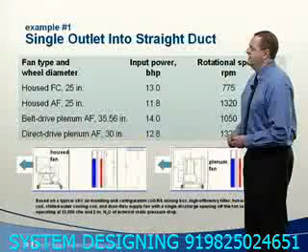Using our same example VAV air handling unit with this discharge configuration, the housed airfoil fan requires 11.8 brake horsepower compared to 14 for the belt drive plenum fan and 12.8 for the direct drive plenum fan.

While the housed fan requires less power, the plenum fans will typically have significantly lower discharge sound levels. The reduced sound levels occur partly because air velocity dissipates more quickly as the air pressurizes the plenum surrounding the fan, and because the plenum provides an opportunity for some of the sound to be absorbed before air discharges from the unit.

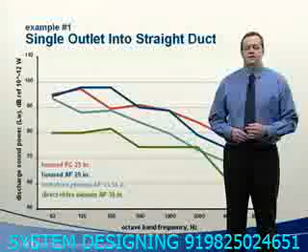The direct drive plenum fan reduces sound levels even further because it does not have the belt-related drive losses and associated noise, and because there are no obstructions in the inlet and the motor is mounted behind the fan wheel, it does not restrict airflow leaving the fan.

Of course, this chart compares discharge sound. On the inlet side, plenum fans will usually have higher sound levels than housed fans. So depending on the fan's location within the air handling system, either discharge or inlet sound may be more important. So the best fan choice depends on the application.

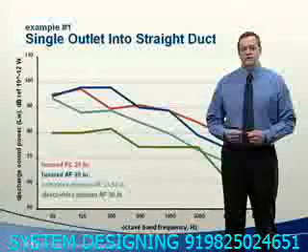If the air handling unit has a draw-through fan that discharges directly into a sufficiently long, straight section of duct that's about the same size as the fan outlet, a housed airfoil fan will typically require less power than a plenum fan, but a plenum fan will likely have lower discharge sound levels.

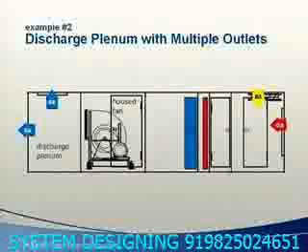Let's look at another example. A discharge plenum is often added downstream of a housed fan to reduce discharge sound levels or to provide more flexibility, like multiple duct connections or to allow for an abrupt change in direction.

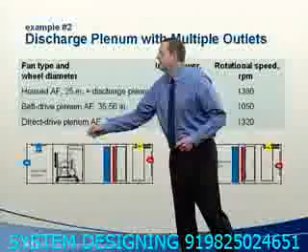But as I mentioned, a housed fan is at its best when discharging into a straight section of duct. When a housed fan discharges into a plenum, the energy losses result in increased fan power. In our example, adding the discharge plenum to the housed fan increases its brake horsepower from 11.8 to 13.2 since it no longer discharges into a straight duct.

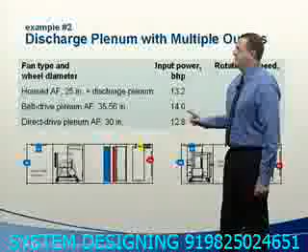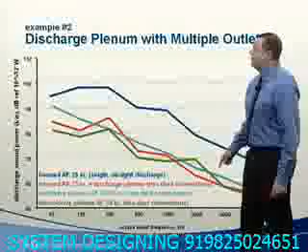This is still lower than the belt drive plenum fan, but now the input power for the housed airfoil fan is higher than the direct drive plenum fan. But adding the discharge plenum does allow the housed airfoil fan to achieve similar discharge sound levels that are fairly close to the plenum fans.

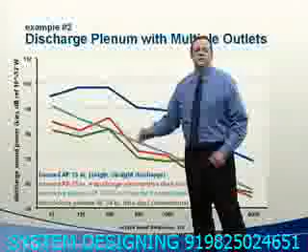In this example, the direct drive plenum fan is still the quietest, especially in these low frequency octave bands that are difficult to attenuate. So, when a discharge plenum is added to a draw-through housed fan, it results in more fan power being consumed, typically to the point where a direct drive plenum fan has about the same power consumption as the housed airfoil fan.

And discharge sound levels are similar, if not better, with the plenum fan. But the air handling unit with the plenum fan will likely be shorter. In this example, adding the discharge plenum to the housed fan increased the overall length of the air handling unit by more than 3 feet.

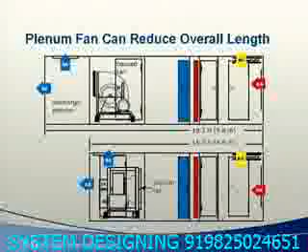When multiple supply duct connections are desired, a housed fan requires a discharge plenum to allow for the multiple connections. With a plenum fan, multiple duct connections can be made to the fan section itself, eliminating the need for a discharge plenum and resulting in a shorter unit. Due to installation restrictions, it's often unlikely that a housed fan can be installed in the ideal configuration as shown in example 1. This makes the use of discharge plenums and multiple supply duct connections fairly common.

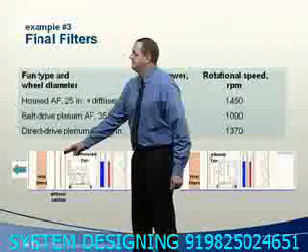Let's look at one more example. In some applications, final filters are included as the last section in the air handling unit. When a housed fan is used, a diffuser section must be added downstream to provide even airflow through these final filters. This is not a requirement for the plenum fan since it pressurizes the surrounding plenum and provides even airflow through the filters with minimal downstream distance.

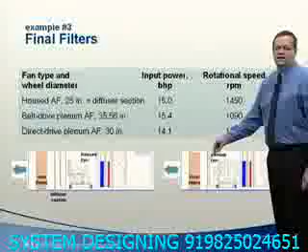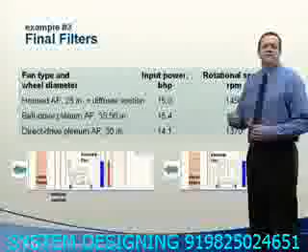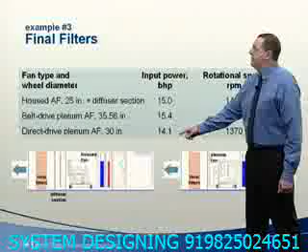In this configuration, the input power for the housed fan increases due to the pressure drop of the diffuser and the fact that the housed fan is no longer discharging directly into a straight section of duct. For our example, the direct drive plenum fan requires the least amount of power, 14.1 horsepower compared to 15 for the housed airfoil fan.

Let's summarize this discussion of housed versus plenum fans.

When discharging into a single, sufficiently long, straight section of duct that is about the same size as the fan outlet, a housed fan will likely require less power than a plenum fan, but a plenum fan will likely have lower discharge sound levels. If a discharge plenum is added downstream of a housed fan to reduce sound levels or to allow for discharge flexibility, a direct drive plenum fan will likely require less power than a housed airfoil fan, with similar or superior discharge sound levels. Additionally, the plenum fan will likely result in a shorter air handling unit.

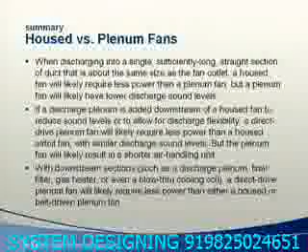When downstream sections are present, such as a discharge plenum, final filter, gas heater, or even a blow-through cooling coil, a direct drive plenum fan will likely require less power than either a housed or belt-driven plenum fan.

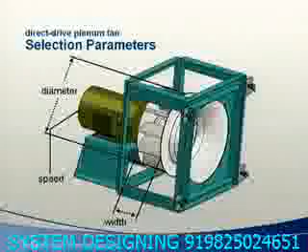Before we leave the discussion of plenum fans, let's discuss the use of direct drive rather than belt drive plenum fans, which have allowed for some changes to traditional paradigms when selecting the fan. Historically, the diameter and width of the fan wheel would often be predetermined by the fan manufacturer of the air handling unit. The variable open to change was the rotational speed of the fan shaft, or RPM, which was adjusted using belts and sheaves.

Today, direct drive plenum fans are available in various wheel diameters and wheel widths. Even though there are no belts and sheaves to adjust speed, the fan can be operated at various speeds by a VFD. In a sense, the VFD on a direct drive plenum fan replaces the drive kit that would be used for a belt-driven fan.

Most people think of a VFD as being used to reduce the speed of the fan, from the motor synchronous speed to some minimum turn-down limit of the VFD. However, the VFD can also be used to operate the motor above synchronous speed. This provides the opportunity to use one of two selection approaches.

The first, which we'll refer to as synchronous speed selection, operates the motor at its synchronous speed, typically 1800 or 1200 RPM. The diameter or width of the fan wheel is then changed to achieve the desired performance.

Flexible speed selection is a relatively new concept in the industry. With this approach, the width of the fan wheel is held constant, and the diameter or speed of the fan is then changed to achieve the desired performance.

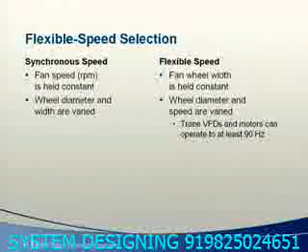As an example, the VFDs and motors that Trane uses for direct drive plenum fans and air handling units can operate up to at least 90 Hz, which equates to about 2700 RPM for a nominal 1800 RPM motor. Flexible speed selections typically allow for a more efficient and quieter fan choice.

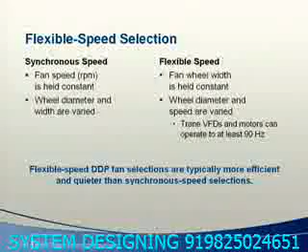Let's look at an example. Using the same example VAV air handling unit, here are two selections for a 30-inch diameter direct drive plenum fan. The first row shows a synchronous speed selection, and the second row shows a flexible speed selection.

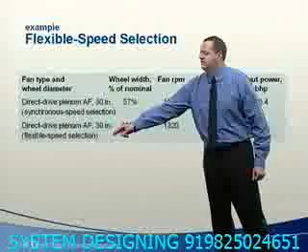For the first selection, the motor's nominal speed is 1800 RPM. To deliver the desired airflow and static pressure, the width of the fan wheel is trimmed down to 57% of nominal width for this particular wheel diameter. And the motor operates at its synchronous speed of 1780 RPM.

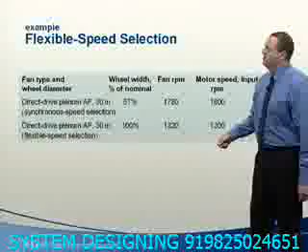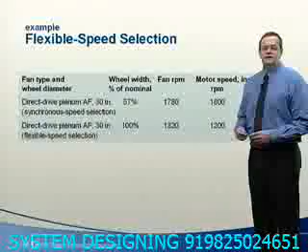For the flexible speed selection, however, the fan wheel is kept at its nominal width. To deliver the same desired performance, the fan wheel need only rotate at 1320 RPM. Here we can use a 1200 RPM motor and operate it above synchronous speed by running the VFD at about 66 Hz rather than at the nominal 60 Hz.

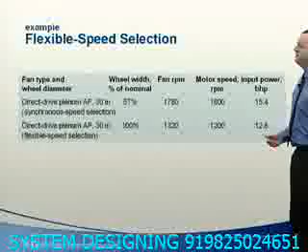The resulting input power drops from 15.4 horsepower for the synchronous speed selection to only 12.8 for the flexible speed selection. And because the fan operates at a reduced speed with a wider wheel, the flexible speed selection will typically result in lower discharge sound levels.